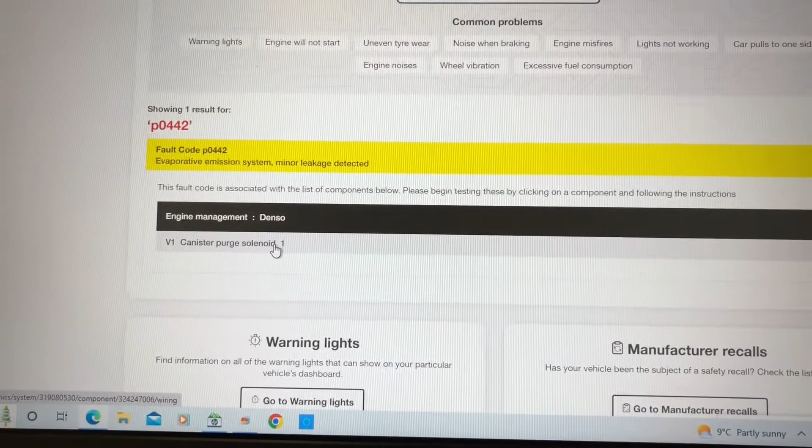I've put in a fault code of P0442. It's telling me that it's this V1 canister purge solenoid. And it gives me a nice little wiring diagram. Hey, that's cool. And it even gives me a step-by-step on how to fix it: connect your multimeter here, and does it work, yes or no? And then we go to the next stage and look at that bit. So that's really good - nice wiring diagrams.

But this is the bit where I feel they're being a bit cheeky. If you dig into their wiring diagrams and electronics - they have a whole section called electronics - what you'll find is what's covered is the engine management system and the ABS, and not the bodywork, body systems, lights, and all the kind of stuff that was included in the old style manuals. So why is that cheeky?

I'll tell you why that's a bit cheeky, because this car uses a Denso fuel injection system. There are only a handful of fuel injection system manufacturers in the world - big ones. There's lots of little companies, but you've got people like Denso, which this is, Bosch, Delphi, Continental, and to a certain respect GM Motors, who manufacture these systems and sell them as an off-the-shelf, bolt-it-on-your-car-and-off-it-goes solution. Engine management and ABS systems are the only systems they have wiring diagrams and fault finding for.

I suspect, and I haven't checked because I've only bought one manual, but so this is a Denso system. I suspect, possibly I'm being unfair, that if you bought another Autofix manual for another car that also has a Denso system, I'll bet you a fiver this is identical.

I bet you they've bought, and fair enough, because information is relevant and they've had to research it and pay for it to license it. They will have bought a Bosch injection system, a Denso system, GM, whatever. So that's cool, I don't have a problem with that as such, but if this manual has the same information as another manual with a Denso system, I'm paying twice for the same information.

So that's a little bit cheeky, isn't it? Now, I might be wrong, but I don't think I am. I think it's no coincidence they don't do the body electricals, which are specific to a vehicle, but they do the generic engine management system, which is not specific to a vehicle. I don't know, bit naughty. Useful, yes, but naughty. So the next thing that we have.

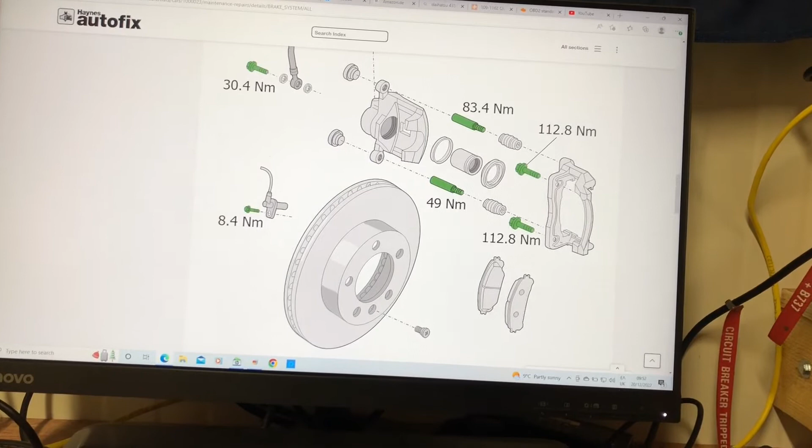This car had a brake problem, as I mentioned. So here is the front brakes of a Daihatsu Terios. I'm not going to argue about this being front brakes because it is, but it's not from the Terios. This is not the system from the Terios.

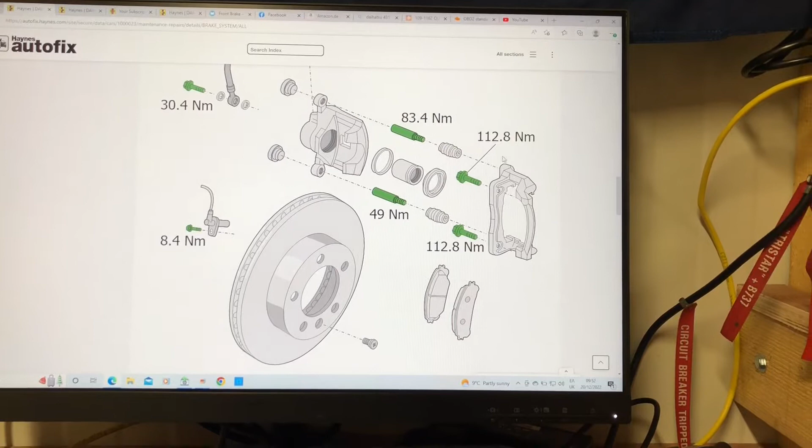General tips and techniques, no longer step by step, best suited to confident home mechanics. Okay, so this is not actually correct. On the Terios, we do not have a screw here.

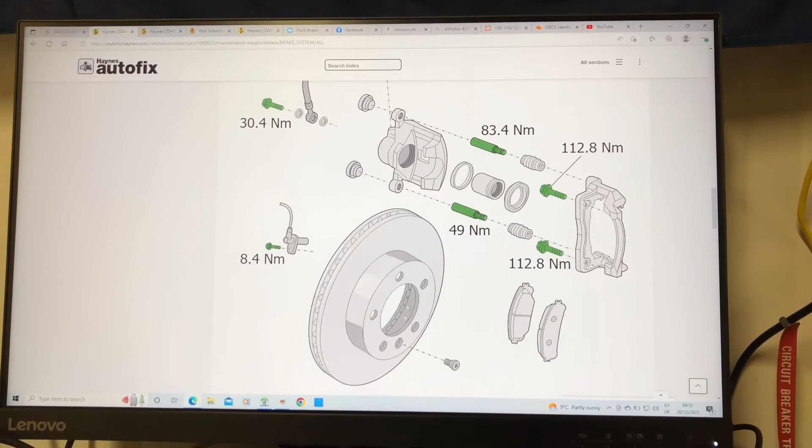We have two tapped M8 holes, and to remove the disc you put two little M8 bolts in there, and you - how do I put this - you jack off the disc. You jack them in and it jacks off the disc. Yeah, so that's not quite right, but that's okay because I'm an experienced DIY stroke professional, so I can work that out myself. No problems.

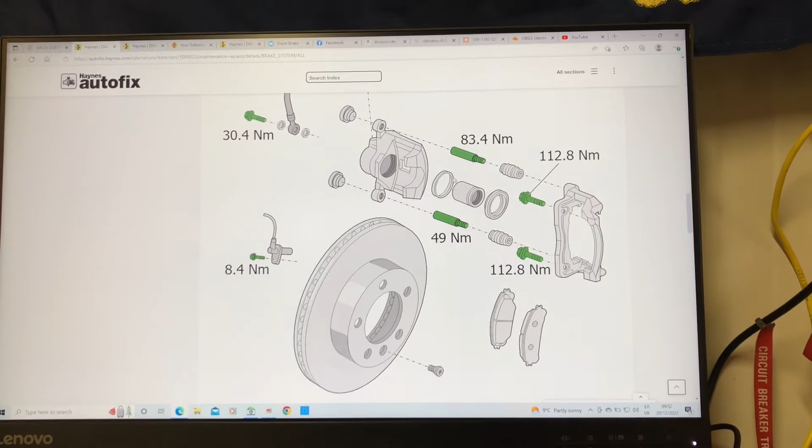These pins are the wrong way around - these brake caliper sliding pins. The threaded portion should be here, and it should screw into the caliper. They've got it the wrong way around. Now, again, I'm a professional, I kind of know that. Well, I don't know that, but I understand that maybe they're the wrong way around. Okay, fine, so I can work that out myself.

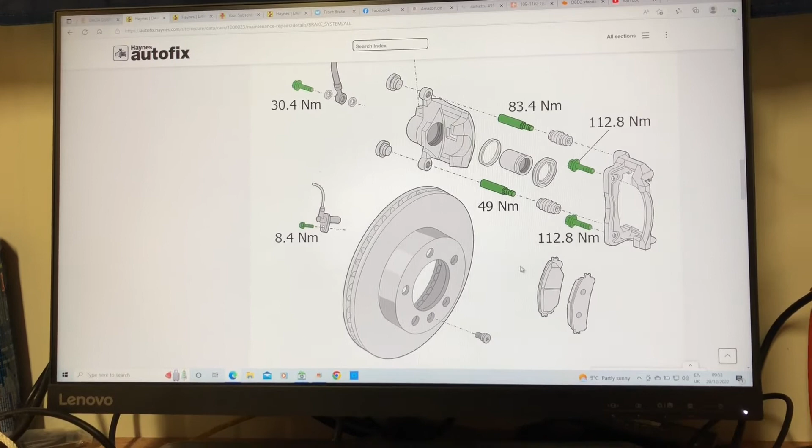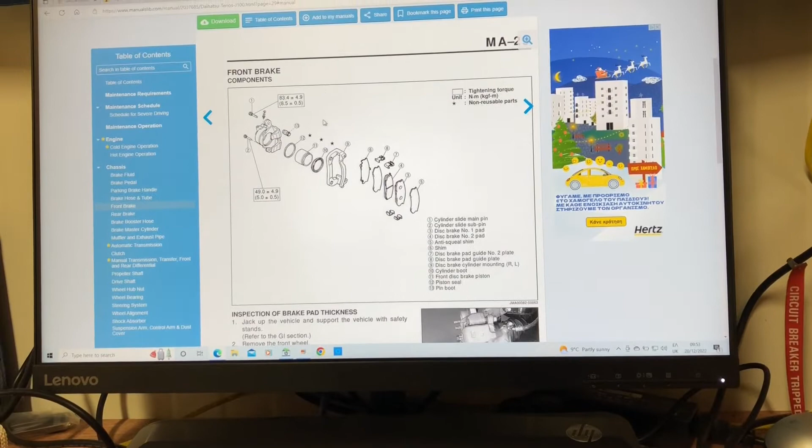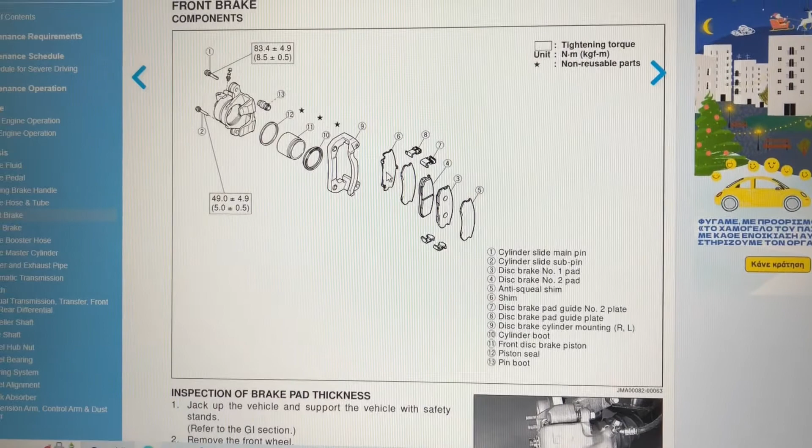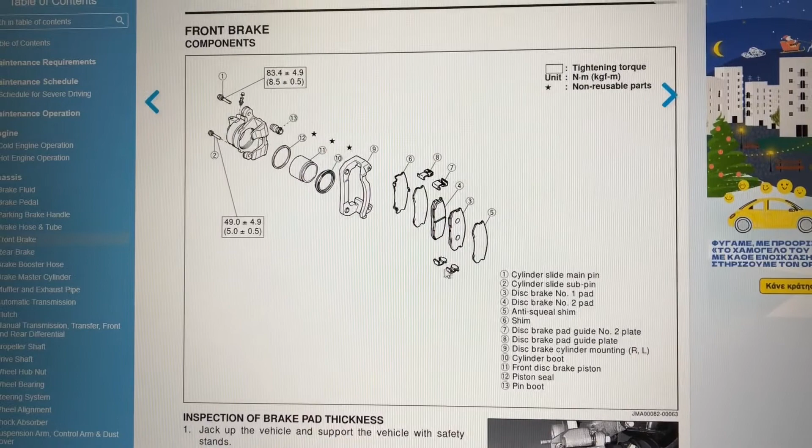This is where it gets a bit silly. Here I've got two pads, and I've got the caliper carrier bracket and the pad bracket. Now if I look at another manual - this is the Terios - the pins are the right way around, they've got the threaded portion at the correct end. You will see that in addition to the pads, I've also got a shim, an anti-squeal plate, another anti-squeal plate, and four pad guide plates. Okay, so there's an additional 7 parts on here that are not shown on here.

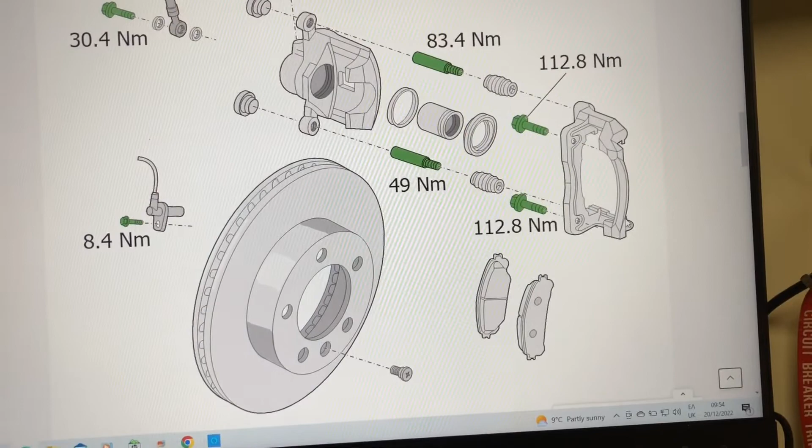With this car, the shim is missing, that's not there. And also, one of the anti-squeal plates has migrated because also one of these guide plates is missing. So the guide plates I can probably work out myself, because if there's 4 of them and there's one missing, so there's only 3, well kind of obviously there should be a 4th. So one of those is missing, and I understand as an experienced garage mechanic professional, all right, fine.

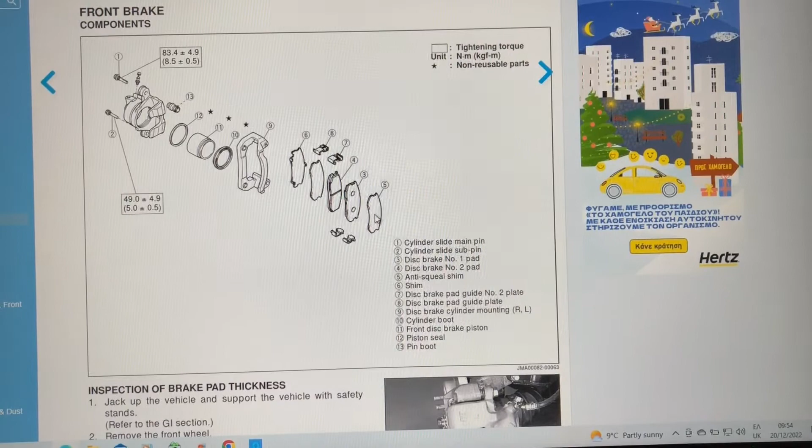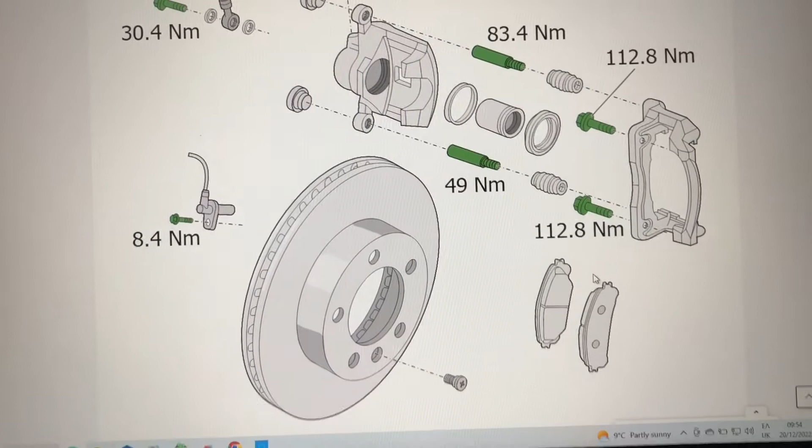One of those is migrated, but it was there, so we need one of these. This was not there. This has not been refitted by whoever did the brakes last. If I am working to this drawing here as a guide, it doesn't show that, so I am none the wiser that that is missing.

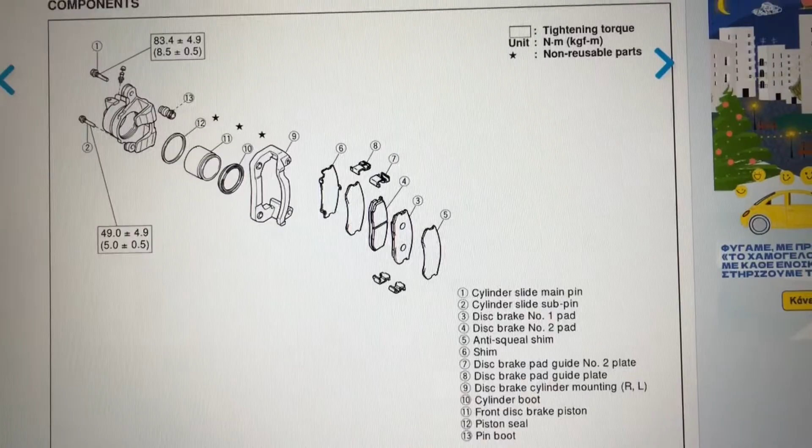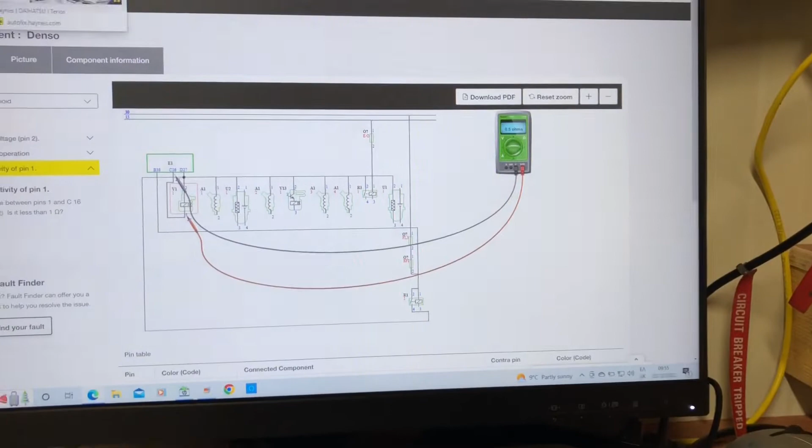So who is this aimed for? Again, because if I'm a professional, and I am familiar enough with Terios brakes to know that I need this, then I don't need that. I don't need the general arrangement because I know enough to know there's a bit missing. So the drawing is wrong. And I understand what Haynes are saying, in that these are general guides. So, oh man, and here is a general guide. Well, that's not the car that I've got. It's a general guide.

It would make sense to me as a consumer, and probably not to Haynes as a business, to not sell this Autofix range of books because I'm a bit disappointed in it. The reason I bought it was because I needed some technical information on the brakes. And in fact, some of that wasn't there.

So, just going back to these brakes very quickly. Torque figures. I did need the torque figures. So, score. Well done. I've got the torque figures. Brilliant. I did need that.

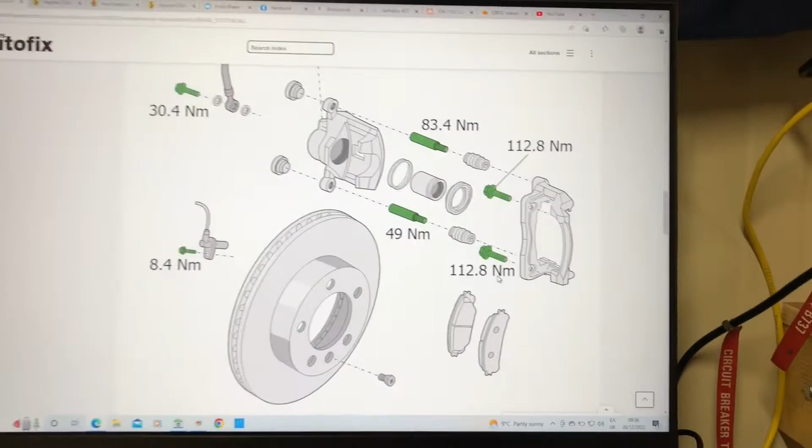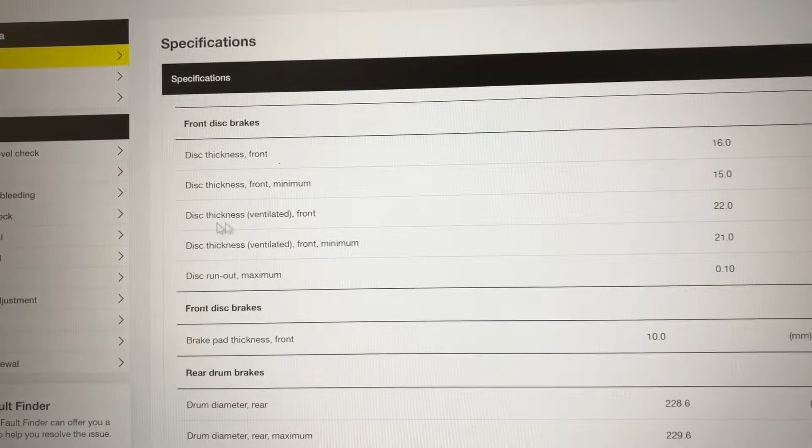Something else I needed, and I didn't know I needed. Specifications for the brakes. Here we go, front brake discs. We've got the ventilated ones here, front. So disc thickness, minimum. Well, that's good, because I now have a data point of this disc is too worn, needs to be replaced. Cool. Disc, run-out, yeah, lovely. Pad thickness, yeah, lovely. Does it mention anywhere there diameter of the discs?

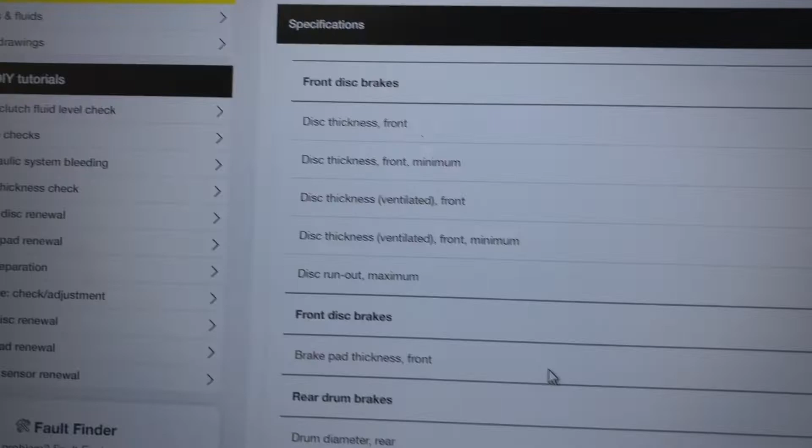Give you a clue. No, it doesn't. Are there two sizes of discs you can buy for a Terios? Give you a clue. There are. 273mm and 287mm. Did I buy the wrong ones? Yes, I did. Oh, man.

So, the one bit of information I did need... No, okay, I needed torque specs. Got that. But the other thing is not there. Ah, but we're a general guide. No, I'm not buying it.

It would make sense, going back, to me as a consumer, but not necessarily to them as a business, to maybe sell, instead of having all this generic stuff about what brakes kind of look like, scrap that, because it's not the same as on the Terios. Let's just have specs. Let's have a list of torque figures for everything on the car, broken down into sections, however you want to do it, and a list of specifications, which would include your front brake disc diameter, for example.

And then I could buy a Denso injection system fault finding manual, or a Bosch injection system fault finding manual, and then a Daihatsu Terios 2007 1.5 litre four-wheel drive automatic specifications sheet. Call it a fiver or something, because this manual was £26, which is about the same price as a full manual. And the full manuals, of course, are based on a full strip down and rebuild. It's a different thing.

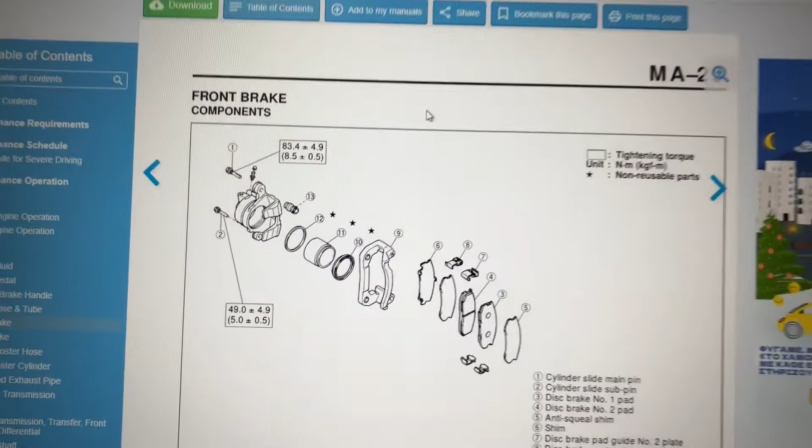So my advice would be, if you can, try and get the information from the internet for your car before buying the Haynes Autofix. The Terios, it's difficult. I did manage to find manualslib.com. It's a great resource. I did manage to find this for the Terios. The problem is I could only find the bit for the caliper. I couldn't find the bit for the discs. So that was the caliper and bracket carrier thing.

So that's why I bought the Haynes manual. So the Haynes manual has provided me with some more information, but I've had to pay £26 versus a lot of stuff free on the internet. So I think there's a better way of doing it, Haynes. And I would, as a consumer, my advice to you would be, if you can, avoid spending the money, because 90% of the information is probably available out there already.

Shame, Haynes. It's a shame, because traditionally you've been very, very good, and the conventional manuals, even the online versions, are also excellent. But the Autofix system of new manuals is too generic, and you're covering yourself by saying it's aimed at professionals, but then not including detailed information that a professional would want. A professional doesn't need to know what a brake disc and pad arrangement looks like. They do need to know the diameter of the specific disc for that specific vehicle, and they do need to know that there are 3 shims and not 2. So, hit and miss. Other options.